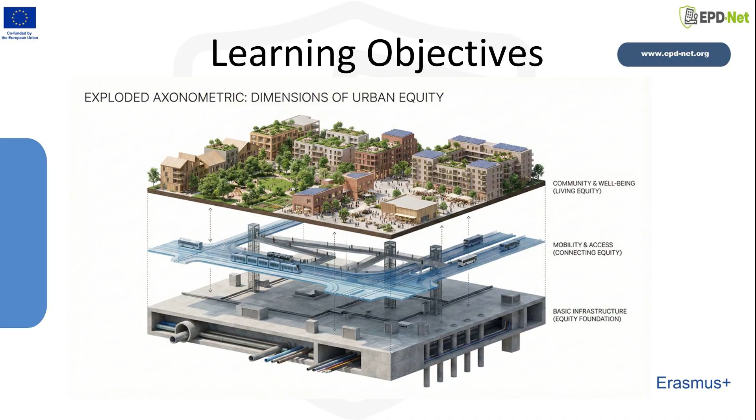The learning objectives of this topic are to define equity and explain its various dimensions, explain equity in the context of urban design, understand how urban design addresses equity, and identify urban design strategies for creating equitable environments.

Through the course of time, equity, equality, and justice have had varying definitions. Equity has initially been defined as fair distribution of resources, opportunities, and outcomes. It has 2 main dimensions which can be used to underline how equity differs from equality. Horizontal equity is explained as the equal distribution of resources, without considering people's different needs, abilities, or capabilities.

This refers to equality. Vertical equity, on the other hand, focuses on fairness and distribution of resources, based on people's needs, which gives it a more justice-oriented focus. This dimension refers to equity.

A tripartite framework for social equity is offered in related literature. The 3 pillars of this framework are distributional equity, recognitional equity, and procedural equity. Distributional equity refers to the equitable distribution of goods, services, and opportunities. Recognitional equity highlights the acknowledgement and respect of different groups. Procedural equity is related to the equitable participation in decision-making processes.

Equity has emerged as a central concern in contemporary urban design discourse, responding to persistent and intersecting social, economic, spatial, and environmental inequalities embedded in cities. Socioeconomic and spatial disparities within cities are manifested in the uneven distribution of income, poverty, occupation, employment, and education across different neighborhoods and districts.

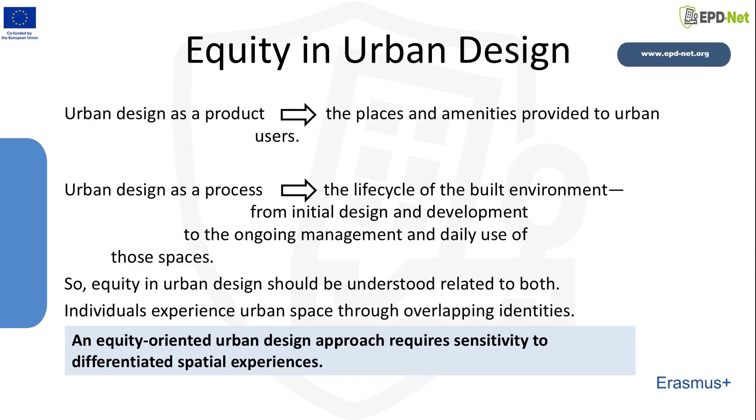Urban design can be viewed through 2 lenses. As a product, it is about the places and amenities provided to urban users. As a process, it encompasses the life cycle of the built environment, from initial design and development to the ongoing management and daily use of those spaces. So, equity in urban design should be understood related to both the product and the process.

Equity must also be understood as intersectional. Individuals experience urban space through overlapping identities related to race, gender, class, disability, age, and migration status. An equity-oriented urban design approach therefore requires sensitivity to differentiated spatial experiences rather than assuming a universal user.

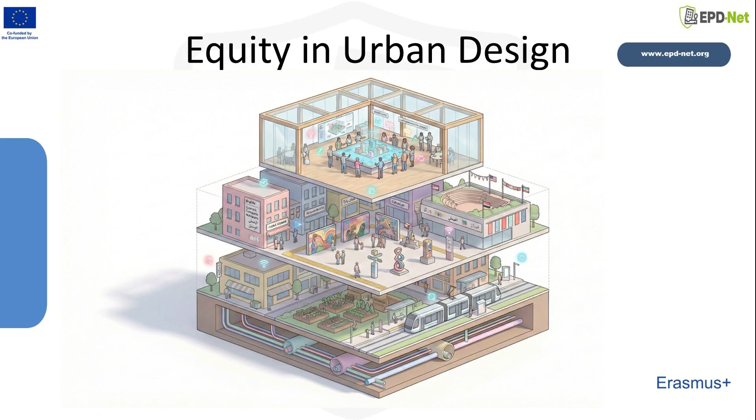How urban design addresses equity can be explained under 5 headings: public spaces, accessibility, urban green spaces, environmental justice, and participation in design process. Public spaces, urban squares, parks, plazas, streets, water and riverfronts among others, are areas where people come together, socialize and experience the city and city life. They can reflect and also shape the communities they serve.

They represent the essence of urban experience, where knowledge exchange, cultural practices, and social interactions occur and can become platforms of recreation and political expression. Thus, they have a significant role in creating more equitable cities.

However, public spaces have not always been accessible by and open to all groups. People who are differently abled are often excluded from public spaces due to limitations by special needs and adaptations. People can be excluded from public spaces based on their age, gender, ethnicity, race and socioeconomic status. Public spaces can be made unwelcome for some groups by surveillance, hostile architecture, policing, and privatization.

Urban design can either reinforce these exclusions or challenge them through inclusive layouts, visibility, amenities, and recognition of diverse everyday practices. It is important to design public spaces in a way that meets the needs of all users and creates new opportunities for social interaction.

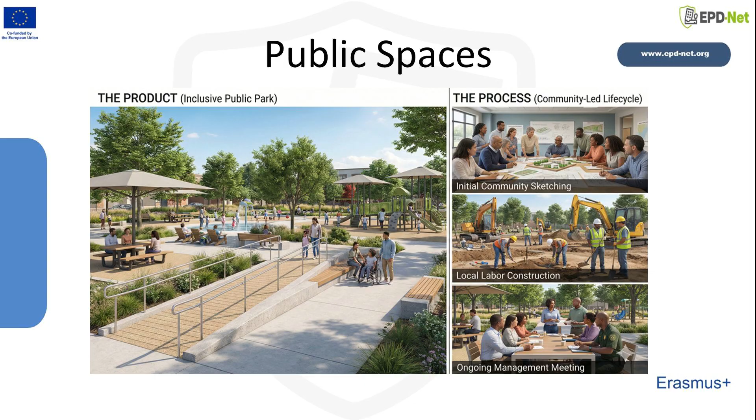Moreover, the distribution of urban amenities significantly impacts the quality of life in both advantaged and disadvantaged communities. Therefore, it can be argued that the well-being of communities is affected by the equitable distribution of public spaces within urban areas.

Accessibility can be defined as the ability to reach social, recreational, and employment destinations from one's home using pedestrian and transport networks. The term accessibility in urban design can be addressed at 2 levels. At the macro level, it deals with a broader understanding of access related to the structural issues of planning and urban development. These issues include how the configuration of transport corridors and the spatial distribution of people and activities affect people's ability to access opportunities.

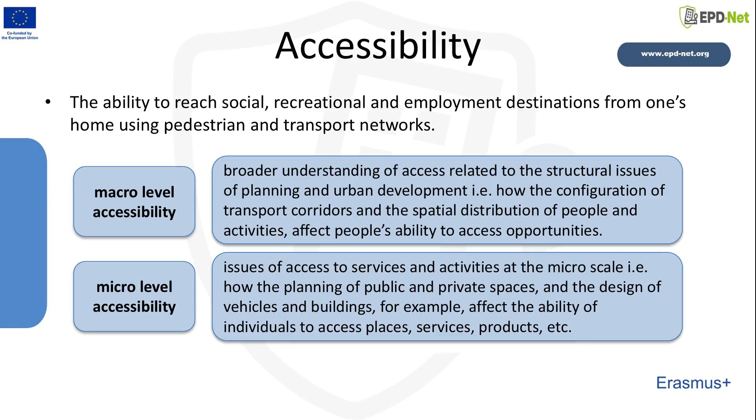Micro-accessibility generally refers to issues of access to services and activities at the micro scale, i.e., how the planning of public and private spaces and the design of vehicles and buildings, for example, affect the ability of individuals to access places, services, products, etc. It includes universal design standards and regulations, as well as construction and planning practices aimed at the inclusion of people with different degrees of motor and cognitive challenges.

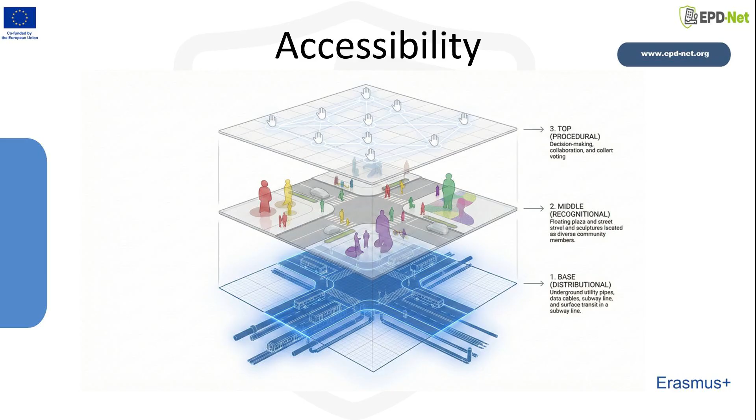Accessibility becomes a fundamental concept in the equity implications of public policies and in evaluating which social groups and localities benefit from them. The response by policymakers, urban planners and designers to equity issues in accessibility has been to prioritize implementation of inclusive and accessible strategies at macro and micro levels, addressing the diverse needs of communities and promoting social equity. Some of those strategies at the macro level include the following: taking into consideration how transportation systems serve disadvantaged and underserved groups and address structural injustices, such as racism and sexism.

Making the use of public transportation easier and more accessible by minimizing the distance between public transportation stops/stations/interchanges and main public uses. Including decisions about transportation hubs/stations/stops which will support pedestrian movement in the design process. Providing and protecting general and individual safety via slowing down vehicle traffic, encouraging to solve pedestrian and vehicle traffic together,

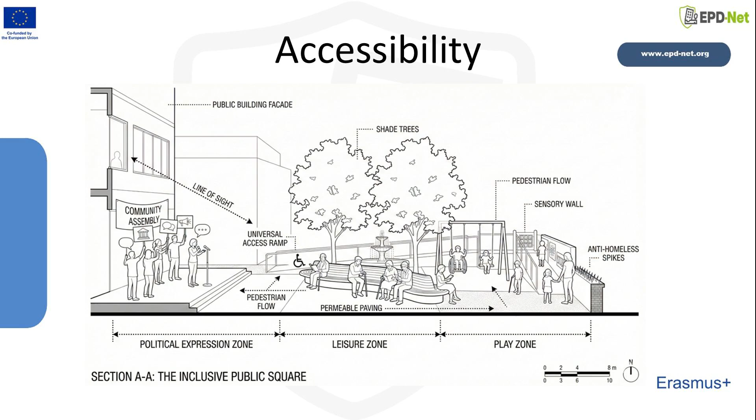and increasing passive surveillance. Creating urban forms that encourage walking and increase the use of public transportation to mitigate environmental problems caused by increased automobile travel and urban sprawl, for example transit-oriented developments, TODs. At the micro level, we can identify two widely discussed concepts related to accessibility and equity in urban design: walkability and universal design.

Walkability indicates how well the built environment supports and encourages walking. It focuses on pedestrian safety and convenience, ensuring that diverse locations are easily accessible while providing an engaging visual experience for the traveler. Non-walkable environments are considered inequitable in many ways. They create environments with noise, air pollution, bleak landscapes, roads that are difficult to cross, and road trauma.

Also, non-walkable neighborhoods exclude disabled people, children, ethnic minorities, the elderly, poorer populations, and other groups, thus lowering their abilities to participate in social life, education, work, or recreation, and by threatening their health and well-being. Walkability can also be considered as a companion of public transportation. In that context, public transport is considered as a facilitator and enabler of walking while traffic and traffic-related infrastructure potentially discourage it. A walkable urban environment can be defined by 6 key attributes.

1. Connectivity: a dense, well-linked path network that provides direct access to daily destinations. 2. Universal safety and comfort: streets that are easy to navigate and cross for all ages and mobility levels. 3.

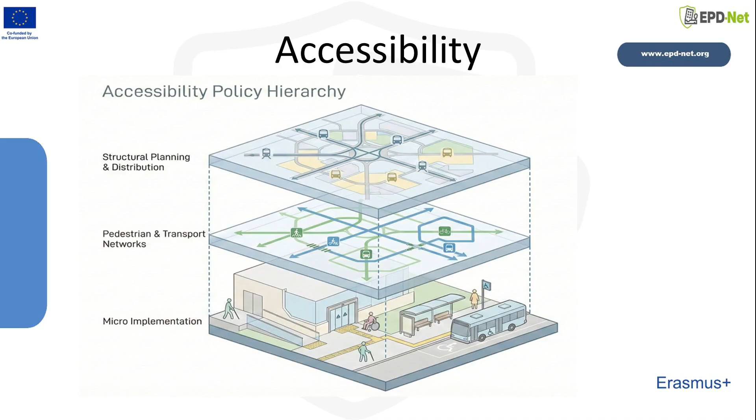Universal design is rooted in the idea that spaces, products, and services should be usable by all people, to the greatest extent possible, without the need for adaptation or specialized design. It underlines equity and accessibility across age, ability, and background. The 7 principles of universal design should be taken into account while designing urban spaces.

Equitable use. Flexibility in use. Simple and intuitive use. Perceptible information. Tolerance for error. Low physical effort. Size and space for approach and use. Some examples of how these principles can be applied are as follows.

Designing the main entrance of a public building or plaza with a seamlessly integrated slope instead of a hidden side ramp. Installing urban furniture, benches, kiosks, ATMs, that accommodates different heights and preferences, such as benches with varying seat heights or armrest configurations. Implementing comprehensive wayfinding systems in transit hubs that use color-coded paths and universal icons rather than complex text-heavy maps. Combining visual signals, lights, audible tones, beeping, and tactile paving, textured ground, at a pedestrian crossing.

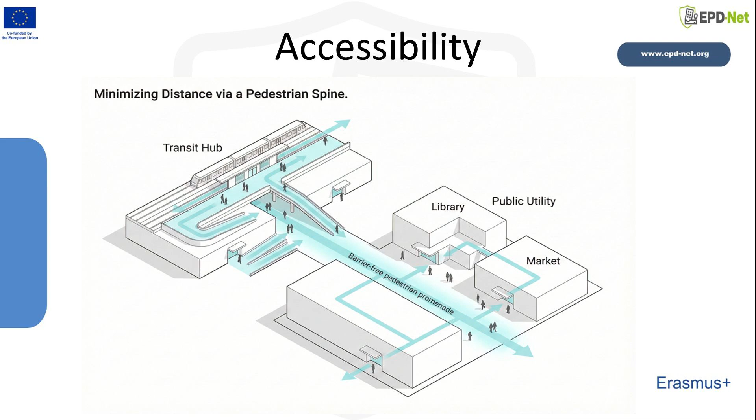Designing curb ramps with tactile warning strips to alert distracted pedestrians or those with visual impairments before they enter a vehicular lane. Keeping pedestrian ramps at a gradient of 1:20 or less so that a person can propel his/her own wheelchair or push a heavy stroller without exhaustion. Ensuring sidewalks are wide enough for 2 wheelchair users to pass each other, or for a full 360-degree turn, approximately 150 centimeters diameter, at bus stops and rest areas.

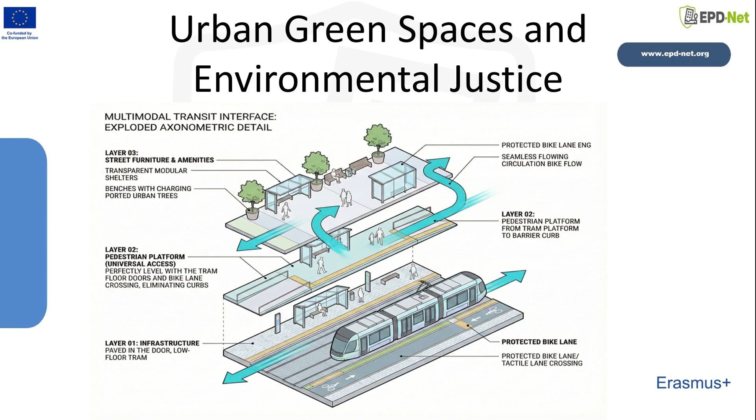Urban green spaces, UGS, including parks, gardens, and vegetated areas, are not just amenities, they are essential infrastructure for urban livability. They improve physical and mental health, foster social cohesion, and support biodiversity. Despite their importance, the benefits of UGS are often disproportionately distributed. Wealthier neighborhoods tend to have higher biodiversity and better maintained landscapes, while low-income areas suffer from green poverty. This disparity is often a form of structural racism, where marginalized and minority communities are left with fewer, lower quality, or hazardous green spaces, leading to significant health disparities. When planning is inclusive, ecological and health benefits are distributed more equitably across the city.

Since the 1990s, the paradigm of environmentalism has shifted from protecting nature to protecting people. The definition of the environment broadened to include where we live, work, play, and go to school. As contemporary debates indicate, it is not possible to address environmental protection without dealing with cultural and social environment. Academic research explains that environmental justice is about mapping the distribution of environmental assets and liabilities. Environmental bads or burdens include air pollution, noise, proximity to landfills, and industrial hazards. Environmental goods or benefits include access to clean water, parks, and high-quality green infrastructure. The questions who gets the benefits and who suffers the risks lie at the core of environmental justice.

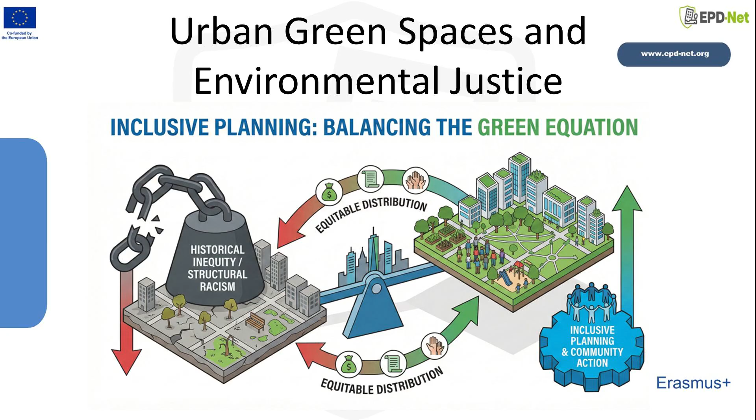The slogan "Right to the City" refers to the right to determine and control all the city and urbanization processes. More recently, it is used to describe the right to the city as the right to change and reinvent the city as people wish. It stands out as an important concept in the context of ensuring participation of the citizens in the planning and design of cities and urban spaces. It is not an individual but a collective right, as reinventing the city will require the exercise of collective power. In the academic context, participatory planning and design is defined as a collaborative methodology that decentralizes power, moving it from the hands of professional experts to the local residents who inhabit the space.

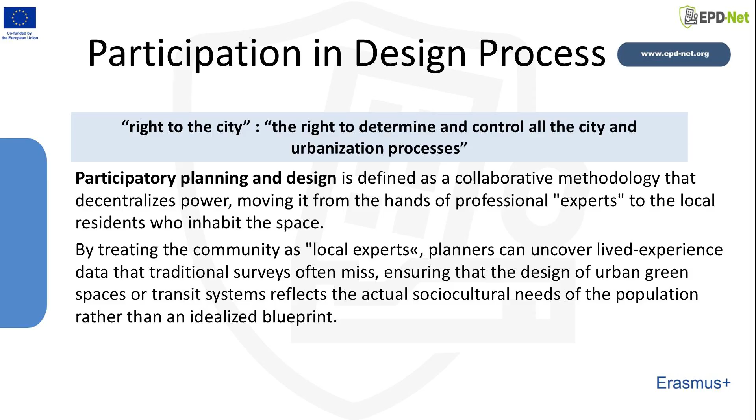By treating the community as local experts, planners can uncover lived experience data that traditional surveys often miss, ensuring that the design of urban green spaces or transit systems reflects the actual socio-cultural needs of the population rather than an idealized blueprint. From a social equity perspective, the participatory process is essential for building social capital and fostering a sense of ownership over public environments.

When marginalized groups are actively involved in the design of their neighborhoods, the resulting spaces are more resilient and less prone to gentrification. Participatory design acts as a bridge between the built environment and the democratic rights of the community, transforming the planning process into a tool for social empowerment and long-term stewardship.

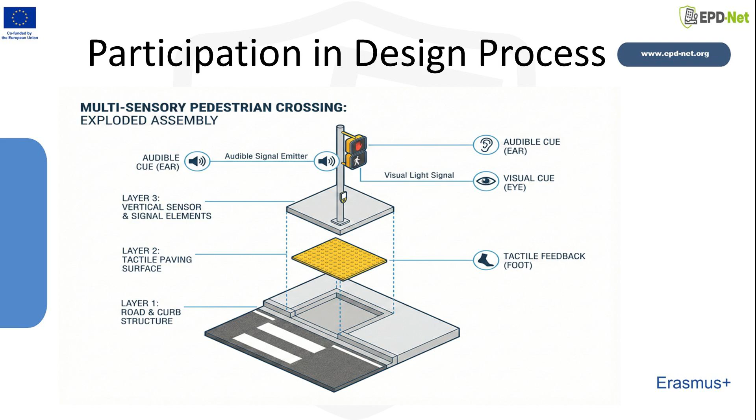Although participation is widely promoted as a pathway to equity, there is a danger that many participatory processes remain symbolic. Meaningful co-design requires long-term engagement, recognition of local knowledge, and redistribution of decision-making authority. For urban planners and designers, this implies a shift from expert-driven authorship toward facilitation and collaboration.

Measuring the distribution of urban resources is a critical prerequisite for achieving social justice, as what gets measured gets managed. Without robust metrics, systemic inequities remain invisible and are often perpetuated by traditional planning models that favor efficiency over fairness. Measuring equity allows planners to move beyond anecdotal evidence to identify areas where low-income or minority groups are deprived of essential infrastructure like transit or green space.

Generally, quantitative tools, GIS mapping, accessibility indices, equity indicators, are employed to assess inequality. However, increasingly now, measuring equity incorporates mixed methods approaches, combining quantitative spatial data with qualitative user experience surveys. This holistic measurement ensures that urban design is evaluated not just by its geometric distribution, but by its ability to provide equal opportunity for health and well-being across diverse socioeconomic strata.

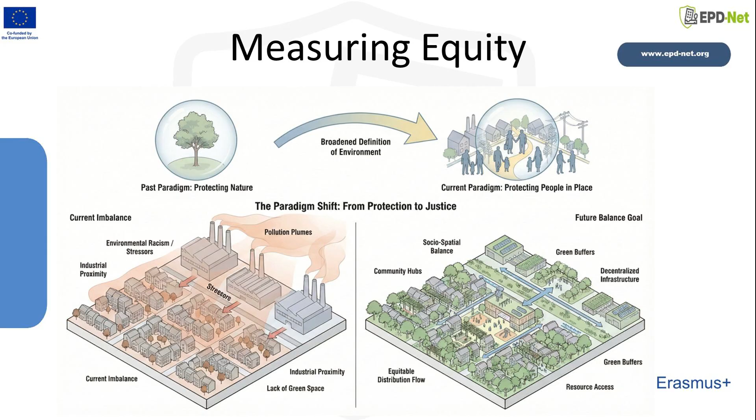To operationalize these measurements, several academic and professional frameworks have been developed. For instance, the Park Score Index was developed by Trust for Public Land. 15 measures across 5 categories: acreage, investment, amenities, access, and equity, are assigned points to determine a city's park score rating. Another example is Sustainable Urban Mobility Indicators, SUMI, developed by the European Commission. It measures the gap between the mobility of an average citizen and that of a person with disabilities or low income, identifying specific accessibility gaps in the transit network.

Key takeaways from this topic are: vertical equity is justice-oriented and focuses on fairness and distribution of resources based on people's needs. Equity in the built environment indicates designing, planning, and managing buildings and public spaces to fairly meet the diverse needs of all people, ensuring access to resources, health, and well-being without burdening certain groups with disproportionate disadvantages. Equity in urban design must be understood related to both the product and the process of creating urban spaces, as urban design deals with them both.

Public spaces, accessibility, urban green spaces and environmental justice, and participation in design process are 4 main areas where urban design addresses equity. Public spaces should be distributed evenly throughout the city and be designed in a way that respects and responds to the needs of all types of users, especially historically excluded users based on their age, gender, ethnicity, race, and socioeconomic status.

Accessibility, at the macro level, deals with designing transportation systems that serve disadvantaged and underserved groups and address structural injustices, planning public transportation stops/stations/interchanges in close proximity to main public uses to support pedestrian movement, providing and protecting general and individual safety, and creating urban forms that encourage walking and promote public transportation to mitigate environmental problems. Accessibility, at the micro level, creating walkable environments in cities should be supported, and 7 universal design principles should be applied in the design of urban spaces.

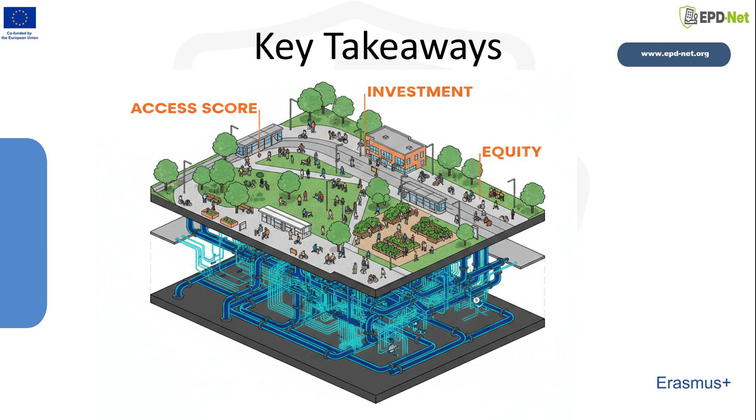Urban green spaces should be acknowledged as vital infrastructure for urban livability, public health, and urban resilience. As environmental justice demands, they should be proportionately distributed within cities and be made accessible by all members of society so that environmental benefits are equitably enjoyed by all. All users should be able to exercise their right to the city by participating in the decision-making and design processes for their environments. Participation should be genuine and inclusive.

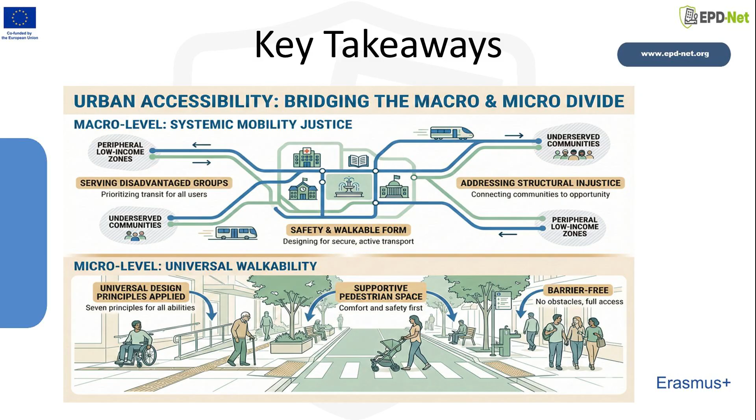Equity, or inequality, in the built environment should be systematically measured using appropriate tools, and the impact of urban design policies on all should be evaluated so that policies can be improved.